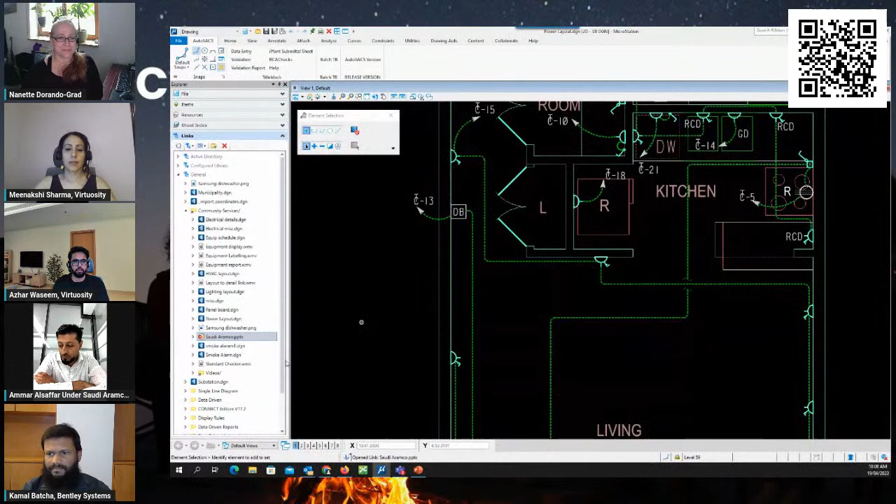So Kamal, can you please help us discuss this in more detail in terms of the file format and the benefits of it? Sure, I would like to share my screen. Thank you, Ammar, for your wonderful introduction.

I agree with you completely. The DGN file format has proven to be reliable over the years. Mainly owner operators like Saudi Aramco benefit from it since they can maintain their assets and keep track of their as-builts for operation and maintenance.

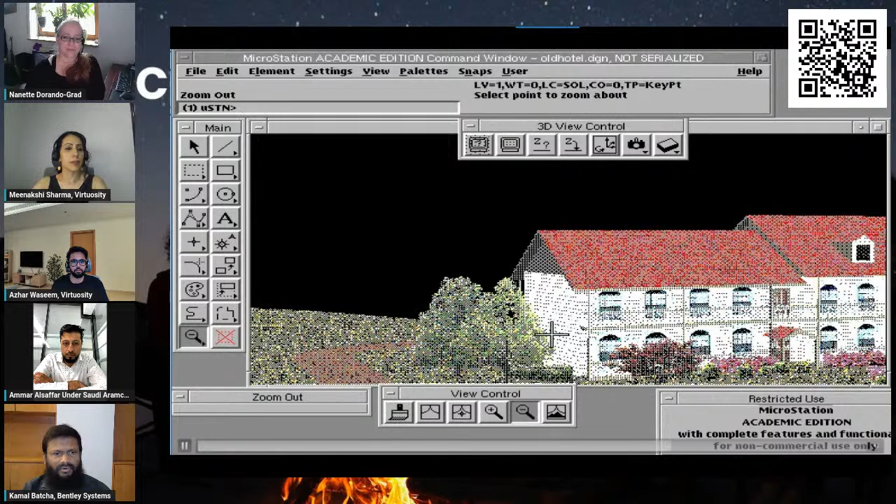Here is a DGN file created using MicroStation version 5, which was released in 1994. This version was demonstrated during Bill Gates' introduction for Windows NT. I know some users in MicroStation in Saudi Arabia used this version, which I learned whenever I deliver MicroStation update trainings for them. You can see the different view control tools for 3D and 2D and how the graphics look.

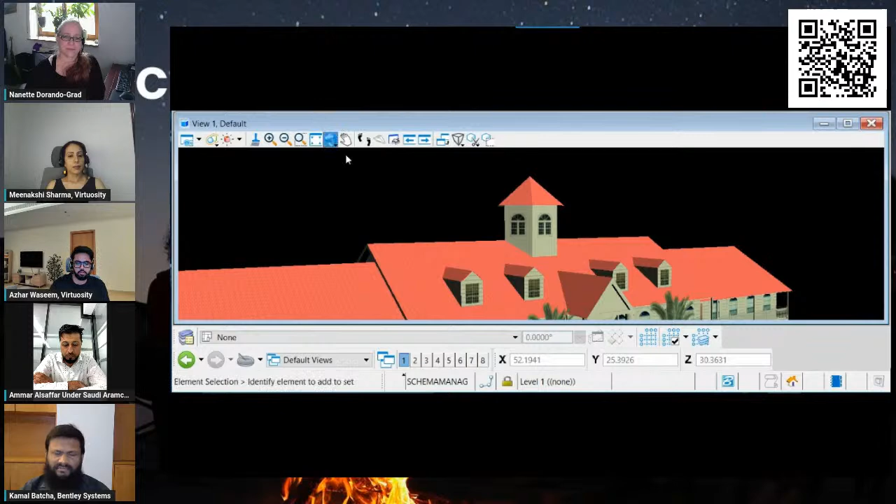As you can see, the same DGN file is accessed and modified in the latest MicroStation Connect edition. There are still many DGN files created in earlier versions of MicroStation that can be accessed in the most recent version. The MicroStation DGN file format has changed only once, in the year 2000, and we have no plans on changing it soon.

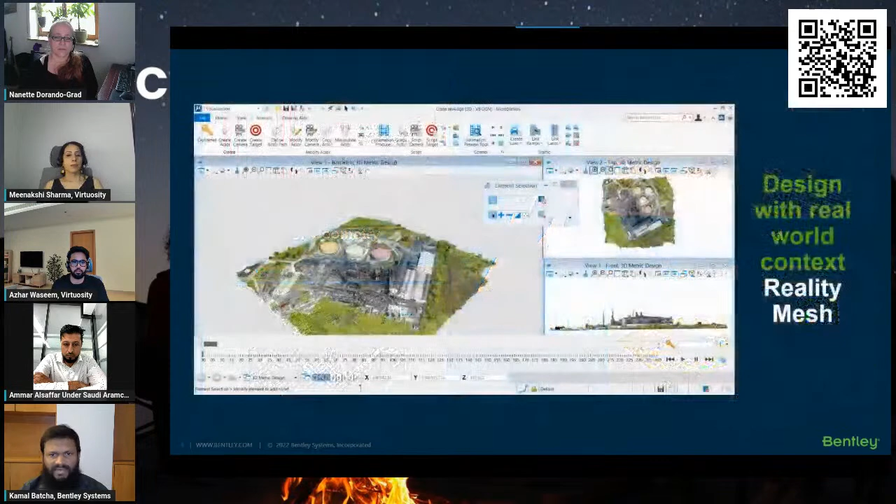One of the reasons I would like to show you here, in this scenario, is the captured reality data of a chemical plant utilized in MicroStation.

A moving crane was animated to determine whether there would be any clashes before bringing the crane into position during the plant shutdown. So MicroStation comes with a full set of visualization and animation tools.

Thank you, Azhar. Please go ahead.

Yes, thank you Kamal. So one of the main benefits of using MicroStation is actually the file format, where the owner operator does not have to release another project or scope of work to get old drawings updated, because that was something very common with most owner operators, since their files used to be old and they couldn't utilize it further.

So the first step was upgrading to support the latest versions, and then they go ahead with the project. Ammar, this question is for you. As I was discussing earlier, the most famous Aramco CAD standard works only with MicroStation. Can you brief us a little bit about the CAD standards that Aramco has?

Our CAD standard has been developed all in MicroStation. We have the cell library for all disciplines: architect, civil, mechanical, plumbing, HVAC, electrical, fire alarm, fire protection. We have all cell standards, made by MicroStation. And also we have standard details for all disciplines, architect, civil, for all. Also made by MicroStation.

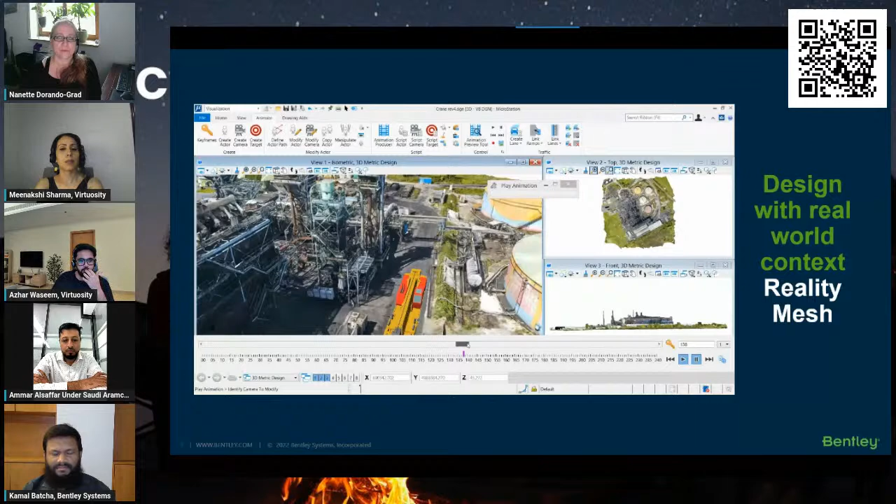Kamal, I believe you have been working very closely with Aramco CAD standards. Shall we discuss a little bit more in detail on what it is, how does it look like? Yes, Azhar, yeah.

As I'm based in Saudi Arabia, I work closely with Saudi Aramco and the Saudi Electricity Company. You can see here a screenshot of Saudi Aramco CAD standards. As Ammar explained, Saudi Aramco has developed its own CAD standards in MicroStation, which includes cell library, color table, border files. There are line codes and logical names for drawing discipline, and there are even title block automation as well. So this custom configuration has been named AutoSACS.

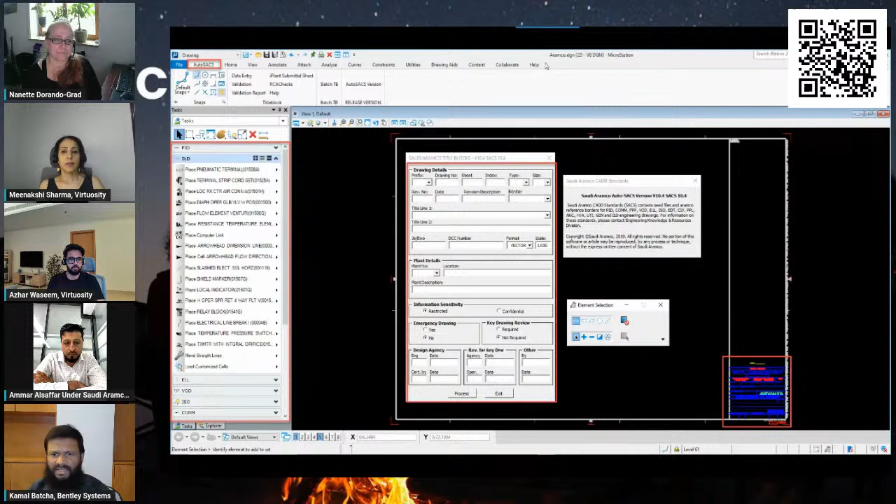It is provided to contractors working on Saudi Aramco projects. And with the use of this custom configuration, the drafting and quality checking time is generally reduced. So we really appreciate the efforts made by the Saudi Aramco engineering team in developing these standards.

And so I would like to just show you a quick example. I have created a CAD standard related to an electrical distribution network. Let me show you how you can reduce your drafting time.

So I can choose the closest to Earth location through the geographic coordinate system, and I can enable the background map from the view attribute window, so that we can exactly work on the project's true location. So I can change it to a street map, it's like a Google map, and it can display it exactly in MicroStation. I can change it to aerial and even hybrid.

So once the location is defined, I just need to open the cell selector or the element templates. I'm just going to start placing an electric substation over here. I go to the annotate menu, and then choose the cell selector. We have different substation cells, so I'll just choose the appropriate one. This time I'll be selecting the 6 feeder substation, and there are different ways to place it.

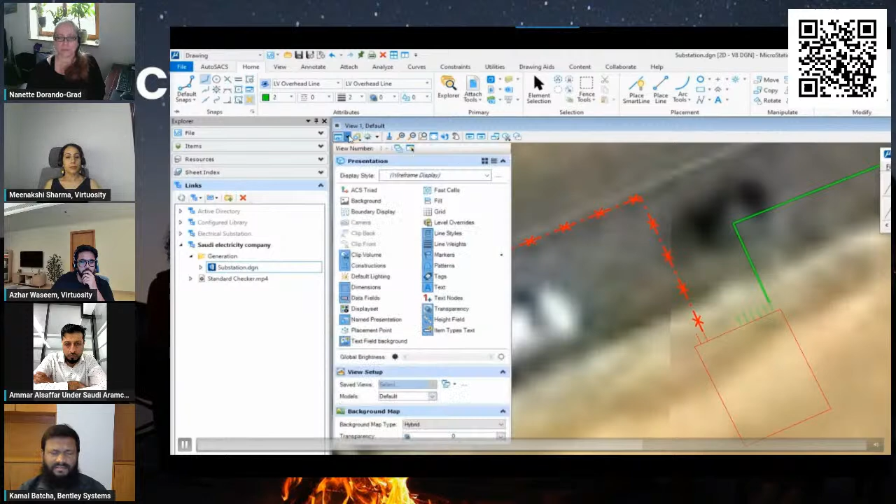And that's it. So in case the designer has chosen a different color that is against CAD standards, let me show you an example of how the error can be corrected. Before that, I'll switch off this background map, and then choose this 13.8 kV overhead line.

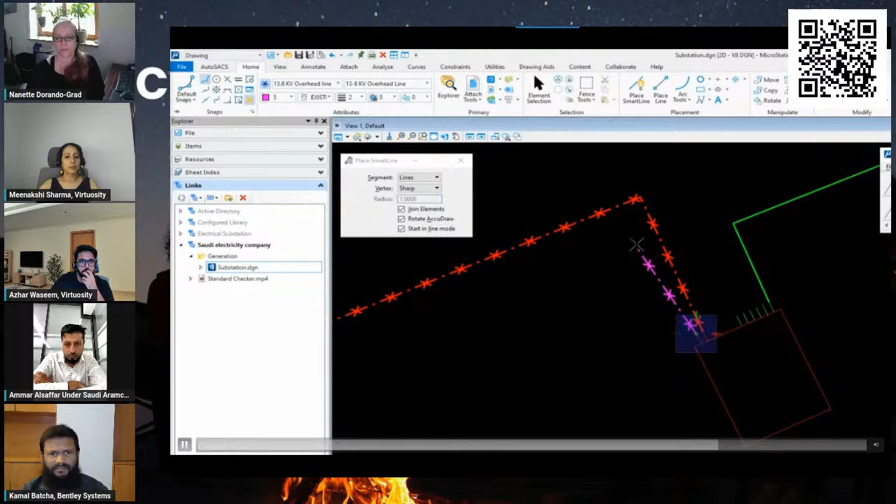This time you can see I'm just changing the color before I place it.

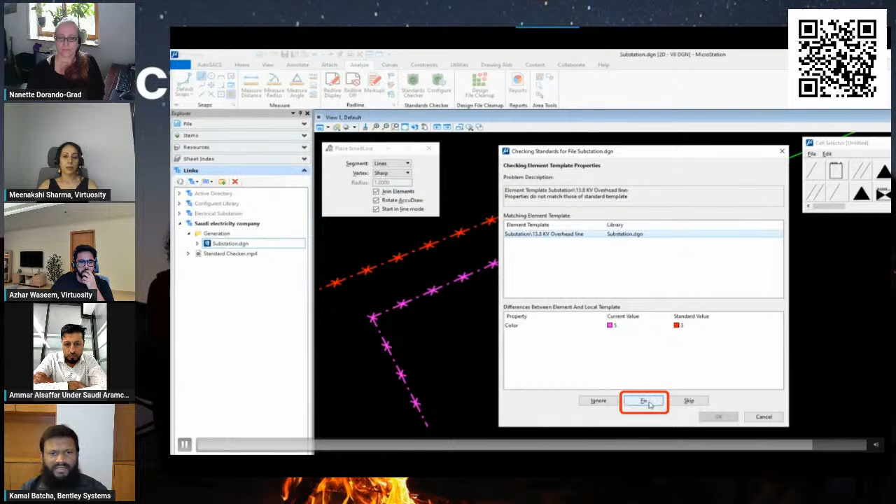So this is against the CAD standard. MicroStation has a standard checker utility to automate the quality check. Using the standard checker, you can verify whether your standards are consistent. You can see here the current value is 5, but the standard value should be 3. So you simply click on fix, and the error is fixed already.

You can also run an XML report and look at it.

Interesting. Yeah, I hope it is beneficial. Yeah, it's pretty interesting.

So I would like to add another thing. Companies working under the Aramco project, or those in the ecosystem of the Aramco project, one main thing you all need to consider is for submittal of drawings, you need AutoSACS for the CAD standards, without which you cannot submit, because the drawings will not be as per the file and they will not accept it. Second reason is Aramco does not accept drawings larger than 7 MB.

Absolutely, because as Ammar said, they have millions and millions of drawings, so they maintain the minimum file size, and it will not be accepted if your file size is above 7 MB. So those are two major reasons for using MicroStation if you're working with an Aramco project.

So Ammar, this next question is technically for you. We know we were helping you upgrade to the latest MicroStation Connect edition, and it was more challenging because you will have to update AutoSACS to support the latest version of MicroStation. But currently, have you upgraded and are you using the complete Connect capabilities of MicroStation?

Yes, now we have MicroStation Connect, and we attend a MicroStation update training from Mr. Kamal. Every month he gives us a session to implement data driven annotation and reports, as well as how to customize our interface to be more user friendly. Time to time, he gives us sessions for that, for MicroStation Connect, and whenever there's an upgrade, he gives us the update.

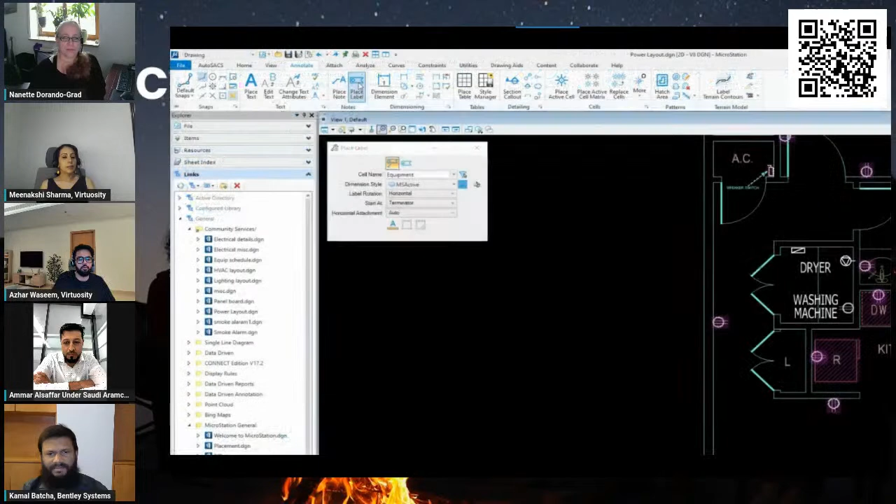That's perfect. So Kamal, can you discuss some of the highlighted capabilities that you showed them that was beneficial for the Aramco employees and that could be beneficial for other users? I recently delivered a MicroStation Connect update training to Saudi Aramco Community Services and Facilities Management team as well, so I would like to demonstrate with a relevant example.

With the MicroStation Connect edition, we simplified the annotating method. Each and every electrical equipment needs to be labeled, so you can see how we just click on the electrical equipment and place a label in the drawing.

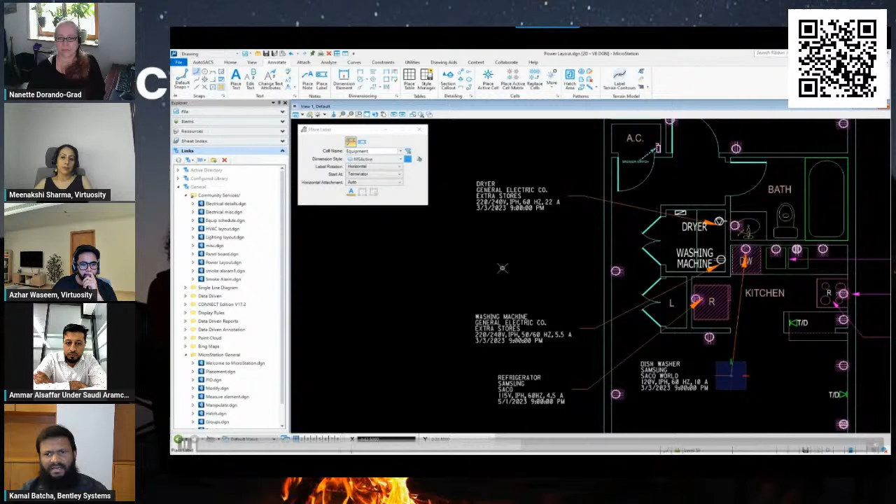The annotations are based on the item property, which really saves a lot of time. If there is any change, you just need to update the item property by right clicking on the element, going to properties, and changing it from there, and the annotations are automatically updated. For example, I'm just changing the date, and also you can see the vendor detail.

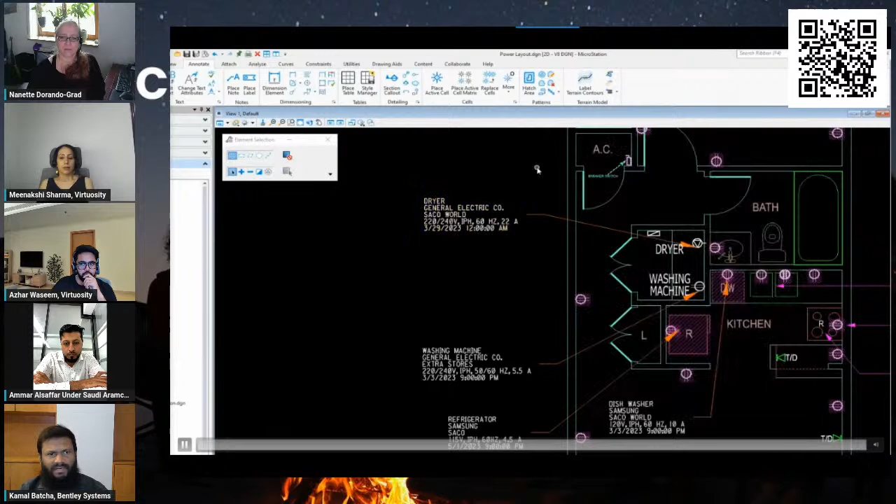Everybody knows extra stores in Saudi, so I'm just changing it to SACO World, and immediately you'll find the annotation is updated here as well.

So the capability has been extended to the facilities management team in terms of reporting. Based on the object properties, we can simply pull the report and place it as a table. As you can see here, I'm just going to the reports, and I have the equipment report.

So you're not making it the traditional way of creating the table and writing all the text, and the tables are even updated automatically when the item property has changed. For example, I'm just going to this electrical equipment, and there is a brand as well as vendor. I just need to change the vendor to Lulu.

And you can see that from the table, I can simply refresh it on the top left. Just right click and refresh the table and you'll find that information is updated, right?

As well, the other capability that's a bonus to the facilities management team is the MicroStation display rule. We can set the display rule to show all the electrical equipment or show based on the equipment maintenance date. So here is an example. You can go to the view attributes on the top and click on display styles and change the display rule.

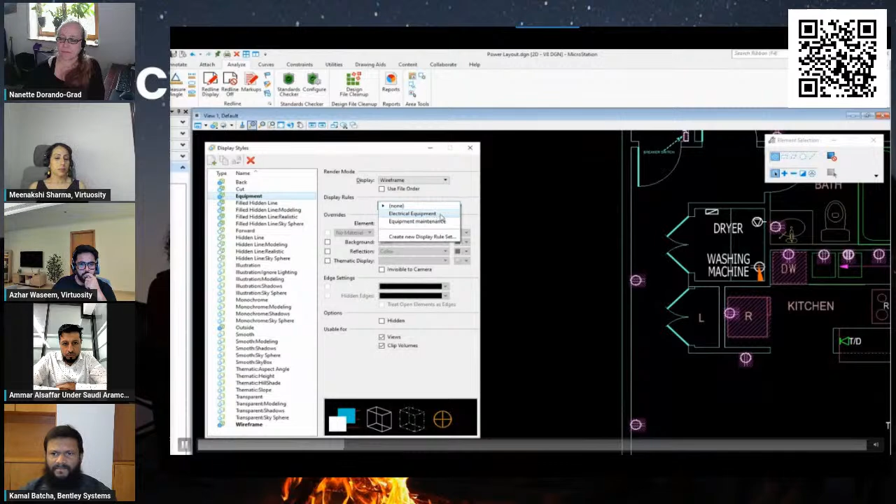To electrical equipment. And you notice the display color has been changed to red and other items are transparent. Similarly, when I change the display rule to equipment maintenance, it displays the equipment based on the maintenance due date, which really helps in maintaining the assets for the facilities management team.

So if I go and change the due date, for example, let me make it the end of April or something. And say okay, and you can see one more equipment has been displayed over here, right?

Okay, Azhar, please go ahead. Perfect, Kamal. Sorry, I didn't want to interrupt you in between, but this is really interesting.

And one thing I saw is that you picked a drawing from the left side panel. So maybe let us know what that is? Yeah, sure.

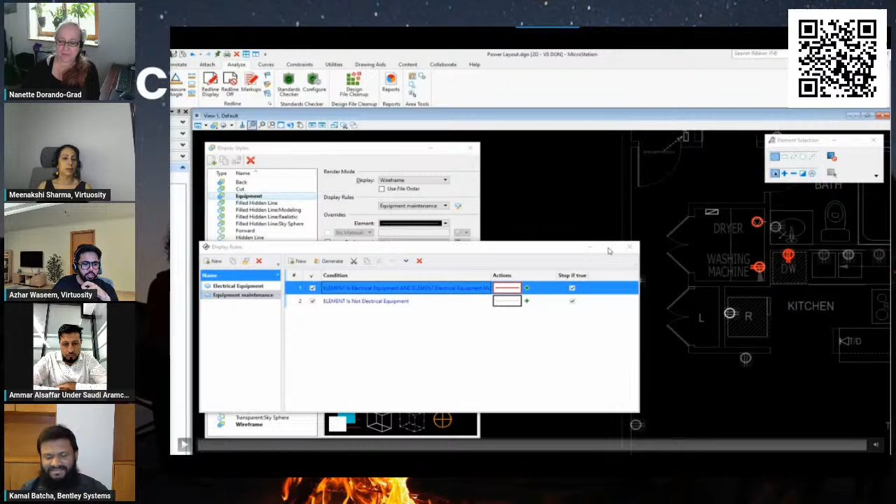So with MicroStation, you can actually create a table of contents that helps organize your project files. These are just a link set. It may be a drawing file, your project data, or images, etc. And it can be accessed directly within MicroStation. You can see over here, right?

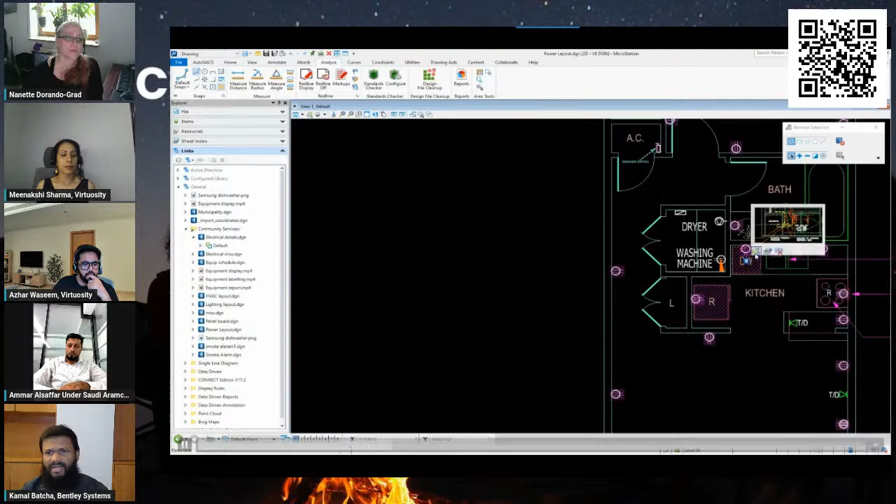So yes, you can easily navigate to different files, and also you can link any data to the MicroStation DGN file. For example, I have linked the detail power layout of this dishwasher. So if I place the cursor on top of the item, it will open the particular file.

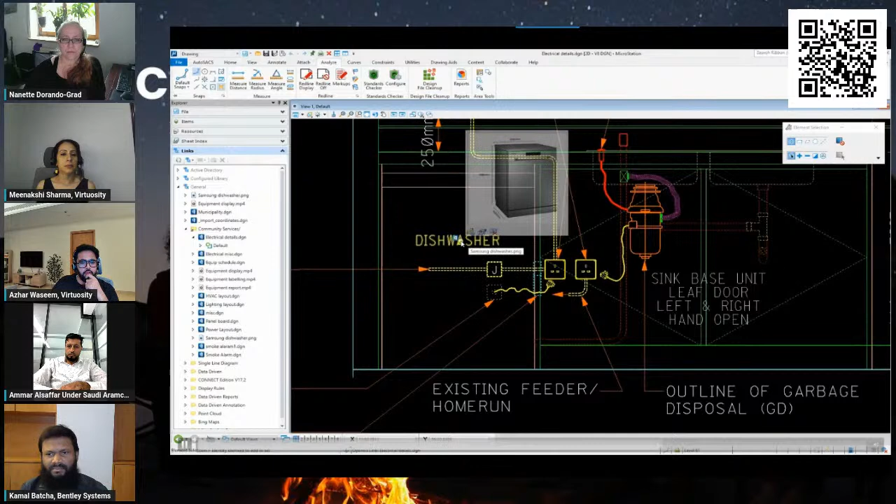So I also attached an image of that dishwasher. You just need to click and open it.

That's it. So we still have a lot of capabilities with the MicroStation Connect edition that helps during the design, as-built, and operations phases. Considering the time given, I have just shown a few of the benefits today.

So I will take this opportunity to really thank Azhar and everybody who is attending the session. We are glad to hear your feedback. Thanks, Azhar. Thank you, Kamal.

I know it looks small because we are having a short duration, but for people who have a library of thousands of different products and items, especially in facilities management, it's a pretty useful feature.

So proceeding ahead with the presentation, now we have come to the last aspect. Nanette, can you please share my slide quickly? Thank you. So we all know MicroStation as a data integrator. I will pass this on to my colleague Meenakshi to talk further on this.

Thanks, Azhar. Let me go over this very quickly. In this era of digital design, where we have successfully achieved process efficiencies and eventual cost savings, the recent challenge is also how do we manage the enormous amounts of data generated throughout the life cycle of a building project? How can we make sure that the captured data does not go unused or wasted?

Statistics show that almost 50% of all reworks in construction are due to poor data and communication. A typical construction project has data coming from various sources. It can include data from a BIM application, a basic 3D CAD tool, or even spreadsheets for that matter.